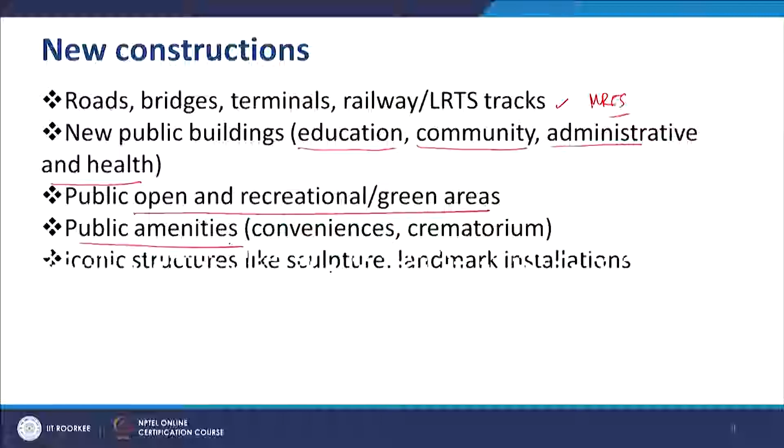Then we make public amenities, for example public conveniences and public crematoriums - all these are required. Iconic structures like sculptures and landmark installations - sometimes we make landmark installations at road intersections or terminals so they can create an iconic structure as a landmark. We create sculptures, landscaping elements, street furniture, and sometimes underground utilities which also help people in various ways. These kinds of construction are required in urban local bodies.

At the same time, we do repair and maintenance - roads need regular repair and maintenance work. Most of the time municipal engineers are busy with road repair and are not able to devote their time and attention to any other work, because roads are such a matter which needs regular supervision and maintenance due to adverse weather conditions throughout the year.

Buildings also need significant repair and maintenance. Underground and overground utilities—for example, the sewerage line, drainage line, electrical line, water supply pipeline—so many networks are there in the cities which we need to maintain on a regular basis, including household connections for water, sewer, drainage, and cleaning.

Now, all these are dedicated works, and what major municipal corporations or cities have started doing is to integrate all the service pipelines in a common duct. They are making a common permanent duct, and within that major duct they are accommodating all the pipelines like this.

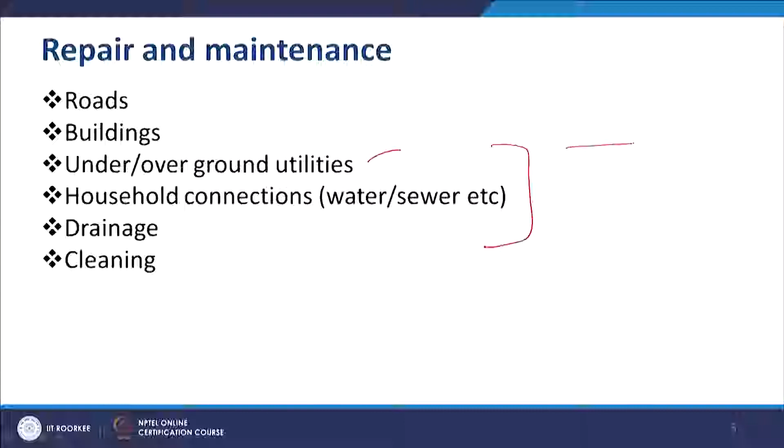This kind of installation is also possible, but definitely this is costly. Even so, it is permanent, so a person can enter and repair it. This is called a permanent common utility duct, and this kind of trend is also coming in a big way in our cities.

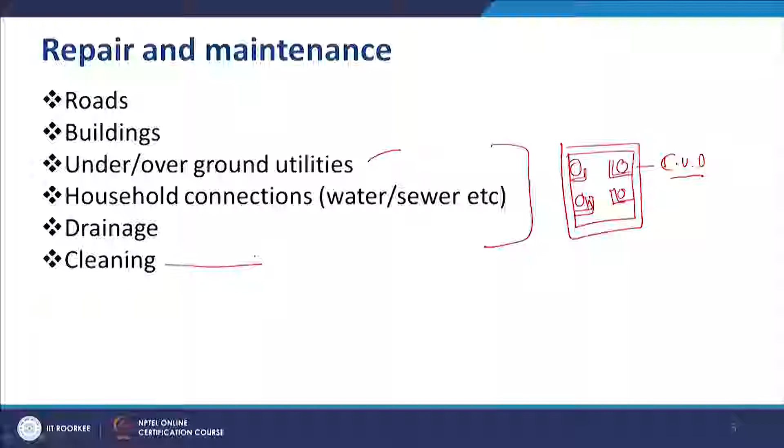Then cleaning is another regular maintenance work in our cities. Every day municipal workers need to clean the roads and other public spaces. So what kind of considerations must we take for the engineering design?

First, I would like to take an example to recall that you might have seen great public buildings or public infrastructure created by the earlier generation. They are very nice, permanent, and nicely maintained, but in the current generation, sometimes due to lack of cost or lack of attention to minute engineering details, it lacks that kind of finish and durability in terms of the lifespan of the building.

So why not we also create buildings and infrastructure which are durable, good looking, giving a pleasant effect, and also giving essential utilities and benefit to the citizens for long years. So major considerations for such engineering design are: number one, it should be durable for a long lifespan.

When I say long lifespan, it should be a minimum of 50 years. Now if you see the major municipal infrastructure created during the British period, colonial time, more than 100 years back, it is still performing well in some cities like Kolkata, Chennai, Delhi, or Mumbai. For infrastructure we are creating today, it should have a minimum lifespan of 50 years.

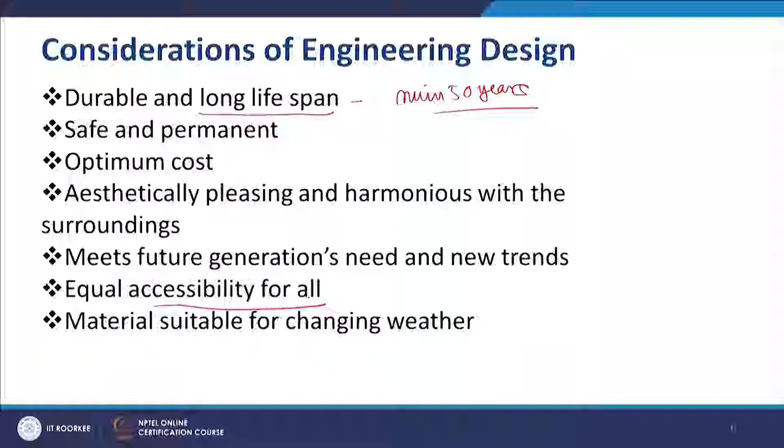Equal accessibility for all engineering and infrastructure design must be given maximum priority, for all categories of age, sex, and persons, including differently abled persons using wheelchairs, and material suitable for the changing weather. In India we have a variety of weather situations.

So based on the weather situation at your workplace, you should choose material which should be permanent in nature, and think about sustainability in terms of repair, change, replace and dispose.

You should not choose a project only based on capital investment. If capital investment is less but recurring expenditure like repair, change, replace and dispose is much more, you should not choose those kinds of projects. Whereas if the capital investment is a little higher than the minimum, but repair, maintenance and operation is much lesser, manageable and sustainable, those kinds of projects should be given maximum priority.

I will mention a few common design and planning terminologies which you will understand as a non-technical person, and this will also benefit technical persons. Few general terminologies used in municipal governance are cost benefit analysis, break even cost, and levels.

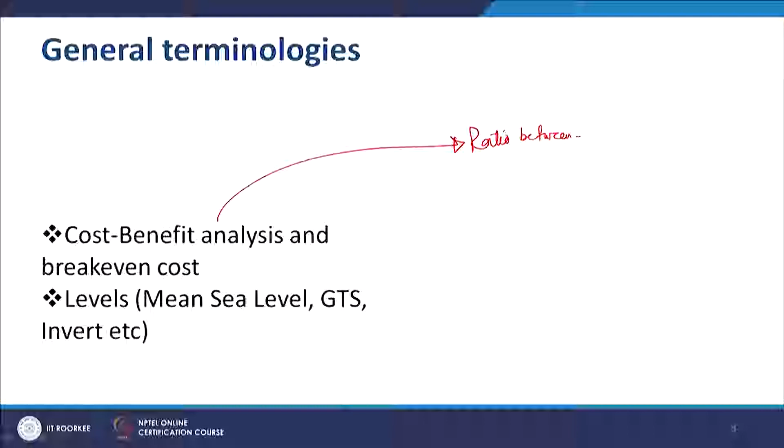Cost benefit analysis is basically the ratio between benefit and cost. So if the benefit is higher than the cost, it should be more than 1.

In a break even situation, the financial benefit is equal to cost, meaning there is no loss and no profit, and most public infrastructures are built this way. But I feel even in public infrastructure, the cost benefit ratio should be more than 1, so there is some surplus which can take care of the sustainability of the projects.

There are various kinds of levels used in engineering design. In most cases we measure the level based on the mean sea level, in short called MSL. In some cases the GTS level is used.

GTS is nothing but, in the British period, there was a Great Trigonometrical Survey by the then Surveyor General George Everest, and based on that survey even now we take GTS levels for land filling or public infrastructure in cities and regions. So sometimes GTS levels are also used.

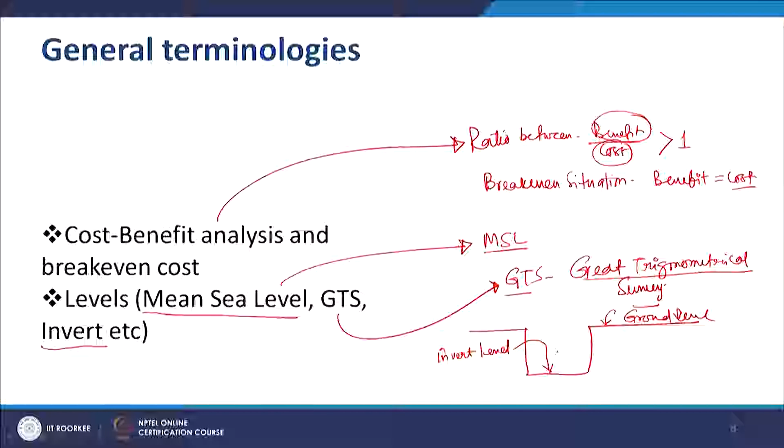Then I'll tell you a few other terminologies, like statutory approval. Statutory approval is basically legal approval. The opposite of statutory approval is non-statutory approval.

For example, making a project report and getting it sanctioned by your funding agency is not statutory approval, whereas a city development plan needs to be approved first by the board of councillors or mayor-in-council, and then by the state government or the district planning committee or metropolitan planning committee — those approvals are termed statutory approval.

Similarly, when a common citizen submits a building plan or development permission, the approval given is called statutory approval for construction of the building. Statutory approval could be for the building, the land use, or the infrastructure, and it must every time be mentioned under some law — usually the Municipal Act, Town and Country Planning Act, or Land Registration Act, and so on.

Similarly, terms like mutation, sanction drawing, and working drawing are very popular in municipal governance. Mutation is the process of changing the name of ownership of land — when you purchase or sell land, you transfer it from person X to person Y through the land registration department, and when that changeover is recorded in the municipal office, that process is called mutation.

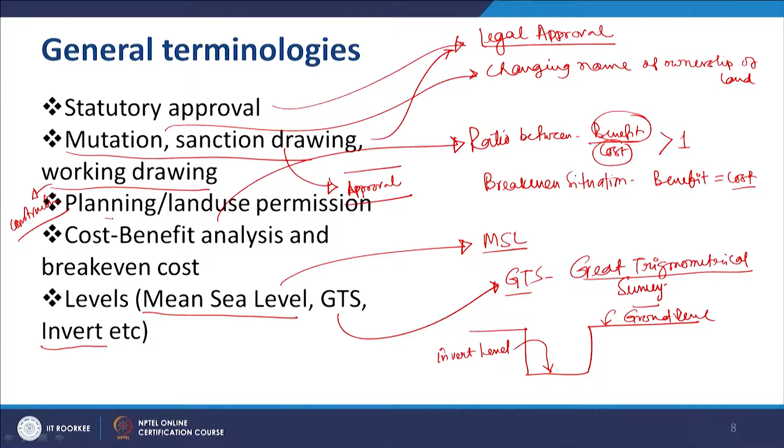Sometimes your role will be as an approval authority, sometimes your role will be as an authority asking for the approvals. Planning and land use permission is given, in most of the cases, under the Town and Country Planning Act.

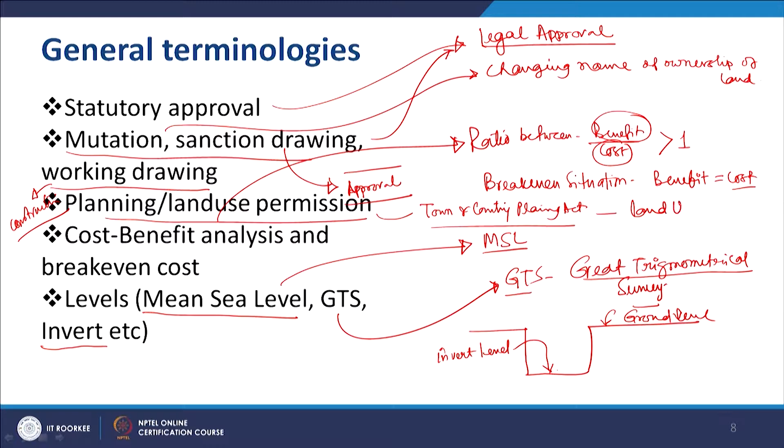It is the permission of the land use. For any construction of the building or infrastructure, you need to take the permission of the land use in particular. So that permission is called planning permission or land use permission.

In most of the cases, development authorities or metropolitan development authorities are entrusted or delegated this power. In some cases, municipal authorities can exercise this power also, if it is given by the state government for the land use permission. After the land use permission, they can go for the statutory permission for the building and the infrastructure.

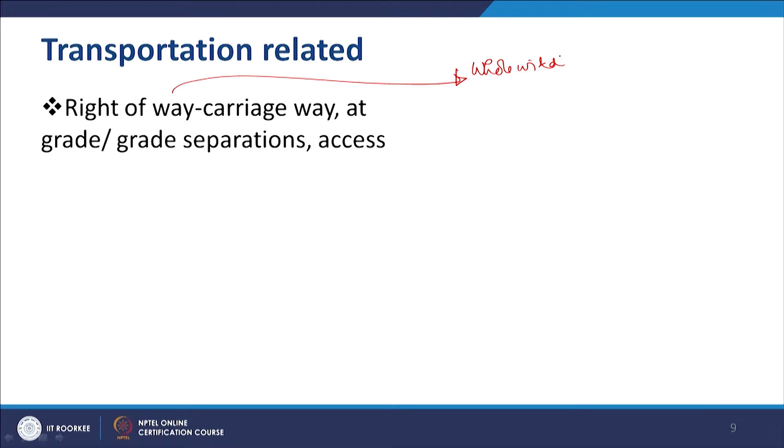After that, there are a few terms related to road and transportation which we use in everyday work. For example, right of way and carriageway. Right of way is the whole width of the road. For example, this is a local road. So this is the property line, and this is also property line, and this is footpath, and this is the area for the vehicle. So this particular stretch which is used for the vehicle is called carriageway, whereas the whole width of the road which is available is called right of way.

Usually carriageway is lesser than right of way, because right of way consists of everything like carriageway, footpath, cycle track, landscaped area, areas for the networks, everything. I have just drawn a very simple section of a local street so that you can understand.

Then, grade separation. Grade is basically the level where the road passes. For example, I am showing a typical traffic intersection which is happening at the same level, without any level difference, where all the journeys are maintained at the same level, either using a signaling system or some roundabout. This kind of level and intersection is called intersection at grade.

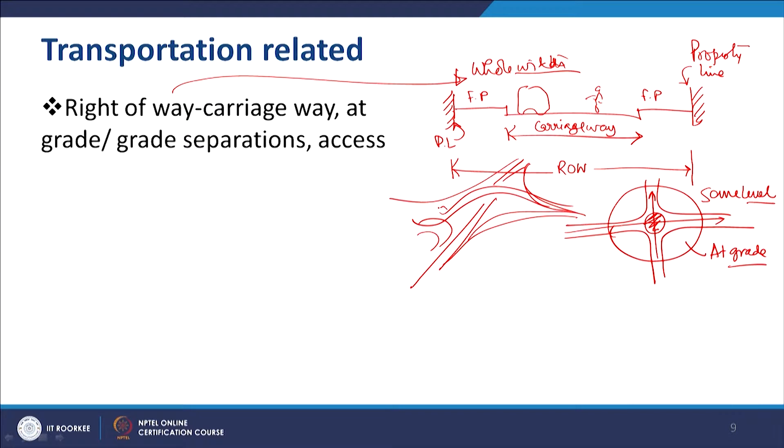So at grade means basically at a single level, and in some cases we can use flyovers like this. You must have seen flyovers like this. So if this kind of arrangement is done, this is called grade separation.

Grade separation is basically separating the grade into various levels, so that one particular movement is given an uninterrupted flow by making various grades. This is a term used in transportation planning, for making new flyovers, upgrading existing flyovers, or existing traffic intersections.

Access is a common term, but it is also a technical term in terms of whenever you are going to give permission for a building. Every building or premises must have a means of access, and without the means of access, the building permission cannot be given.

So the first thing which you should check is the land ownership document for giving any permission. Second is the means of access. If there is no acceptable means of access, sometimes municipal authorities make a benchmark that for less than 3 meter means of access, building permission cannot be given. So those kinds of stipulations are there, and access needs to be checked before giving any permission.

Further, we use various curves like summit curve, valley curve, simple curve, compound curve, spiral and reverse curve. In this kind of traffic intersection, when there is a curve like this, it is called a simple curve, having only one center and radius.

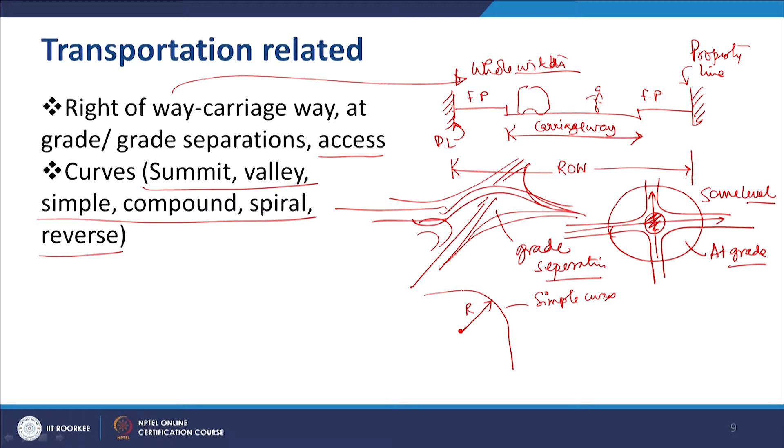Then we can make a compound curve. A compound curve has more than one radius.

We can have spiral curve, which we use mostly in traffic intersections, or we can have a reverse curve, something like this. And then we can have summit curve and valley curve.

Summit curve is when a flyover is made like this. This is called summit curve, which is utilized for reaching the topmost portion of a flyover, and this is called valley curve, which is taking the vehicle from the ground level to the higher level. So, these are the terminologies related to curve we use for geometrical design of the road, horizontally and vertically both.

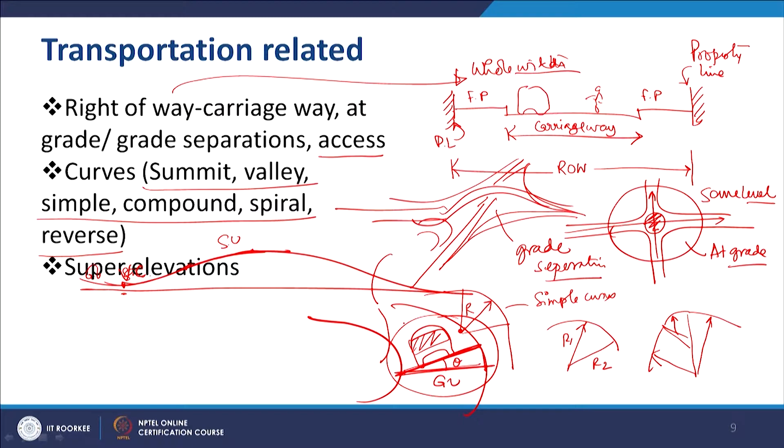Geometrical design of the roads can be horizontal, vertical, or other than roads we can also design flyovers. Super elevation is used when we calculate the turning of a road and vehicle. When a vehicle turns along a road there is a super elevation required, if this is the ground level and this is a turning, this should be the level where the new angle is required to maintain the speed and safety of the vehicle. This phenomenon is called super elevation. It is an essential design element which we maintain whenever there is a curvilinear pattern of any road or flyover.

Then there are terminals. Terminals are basically the termination point of any transportation network. It can be a railway terminal, a bus terminal, or a metro rail terminal.

TOD is basically transit oriented development. In many cities in India there are metro rails or mass rapid transit systems being developed. Along the mass rapid transit system, high density compact developments are being encouraged. That kind of development based on compact high density walkability and a mass rapid transit corridor is called transit oriented development. In cities like Mumbai, Calcutta or Delhi, the suburban railway system is also based on transit oriented development.

Trips, as you know, trip is basically a unit of transportation, travel from place A to place B by any means is called a trip. A trip could be educational, for home and office, or for any recreational purpose. Travel demand is the demand in terms of trips, number of trips from one zone to another zone, and that is calculated based on the demand and surveys.

Traffic volume is the traffic volume at a given point of time in any cross section of a road. Turning radius is the minimum radius required for turning a particular vehicle. Turning radius for a bigger vehicle will be more than the turning radius of a lower vehicle. For example, for a small car the turning radius could be 4.5 meters, and for a large truck it could be higher, like 12 or 13 meters. All these are given in the codes, IRC codes, but I just mentioned them for your better understanding.

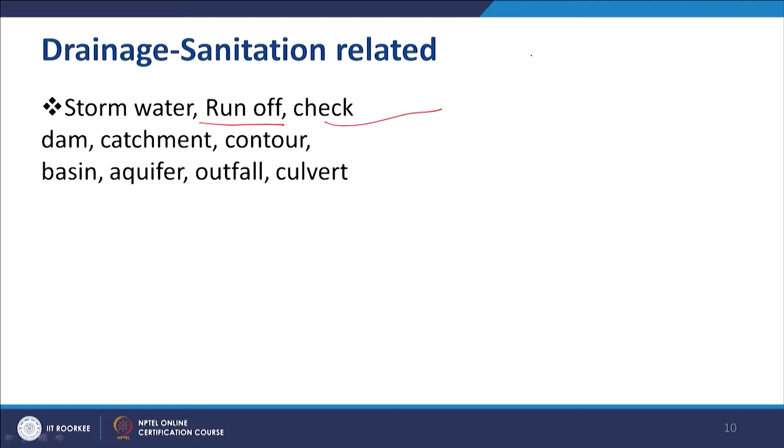If there is a flow of water like a river, check dam is used to control the river water, and after controlling it, to use the river water by desired means. That is called check dam.

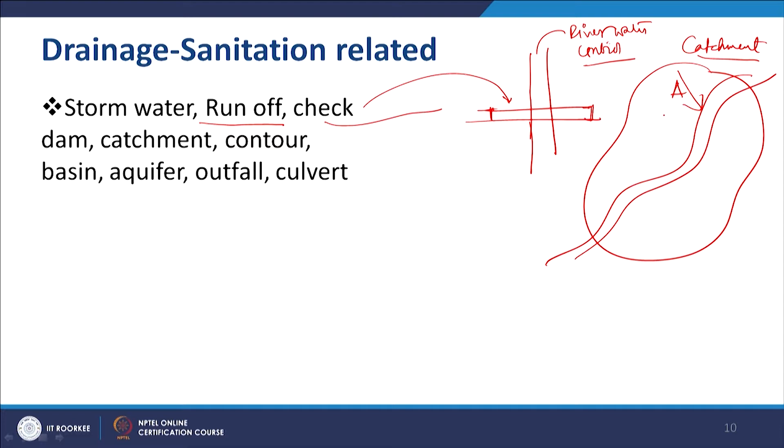Catchment is a technical term used in drainage and other purposes. Catchment, as discussed earlier, is a geographical area which accumulates the water of a particular basin. If there is a river like this and the surrounding areas, and the water of the surrounding areas is collected into that river only, then that is the catchment area of that river, and the whole area is also called the basin area.

Aquifer is the term we use for levels below the ground level. If this is the ground level, then there are several layers, and below some layers there are layers of water. That water layer below the ground level is called aquifer.

Why is it important? Because the level of the aquifer will help you determine the depth of your foundation, depth of your various underground installations, and also in some cases whenever you need to take water from the aquifer, that also requires this kind of data.

This data is available under Government of India websites, and aquifer is a very common term in normal drainage and sewerage construction. Outfall is the natural element like a river, lake or canal, where the runoff due to storm water goes and discharges. Outfall is another technical term used here. For example, in this case, the river itself is the outfall of this water.

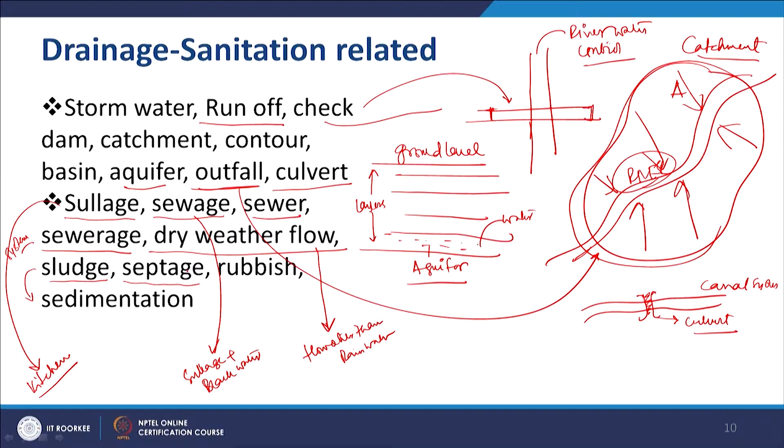Sludge is the decomposed liquid which is discharged into a sedimentation area after the treatment. Septage is the science of sewerage and sanitation using the septic tank, that is called septage. Rubbish is the construction and other waste which is collected at municipal constructions or various activities, and also treated and disposed of in some other particular place.

So these are also a few terminologies which we use very commonly as day-to-day terminologies for sewerage and drainage. Then there are a few terminologies related to building construction. Admixtures are various mixtures used in building construction: cement, concrete, stone chips, sands - all these are admixtures.

Area, FAR, ground coverage - areas, particularly after RERA, the Real Estate Regulation Act, we use carpet area. Carpet area is basically the usable area within an apartment. If we add the areas of the walls and a few common areas, it becomes the built up area. So built up area and carpet area are both very important terminologies used in building construction.

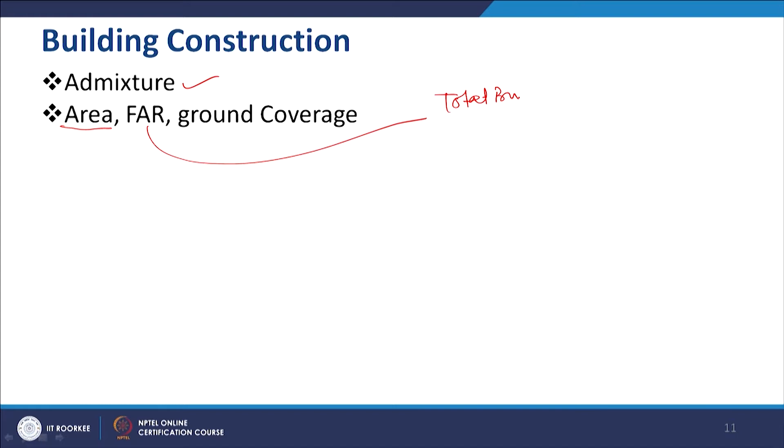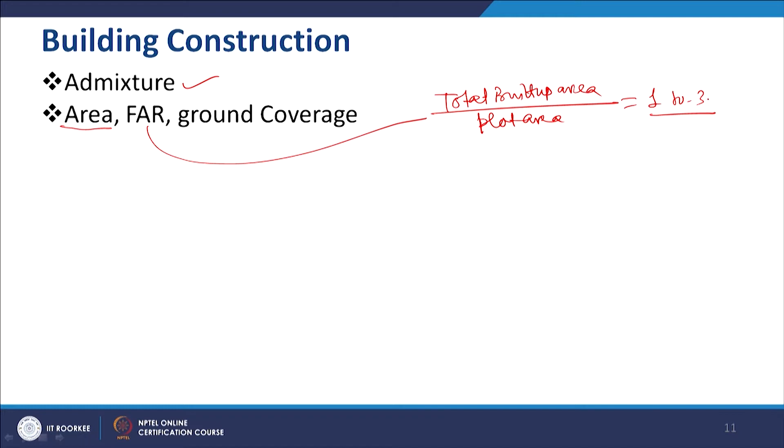FAR is basically the total built up area divided by the plot area. Usually it is more than 1, it can be 1, 2, 3. Usually you can check your local bylaws for what applies.

Ground coverage - if this is the plot and this is the building premises, so if the total area is A and the covered area is small a, ground coverage is basically small a divided by A, expressed as a percentage. One common confusion people make is that if in elevation a building has some projection, the projected area also comes under ground coverage. So do not be confused - projected area is also included in ground coverage. It is not that you keep a setback at ground level and then at a higher level just make the projections; it does not work that way.

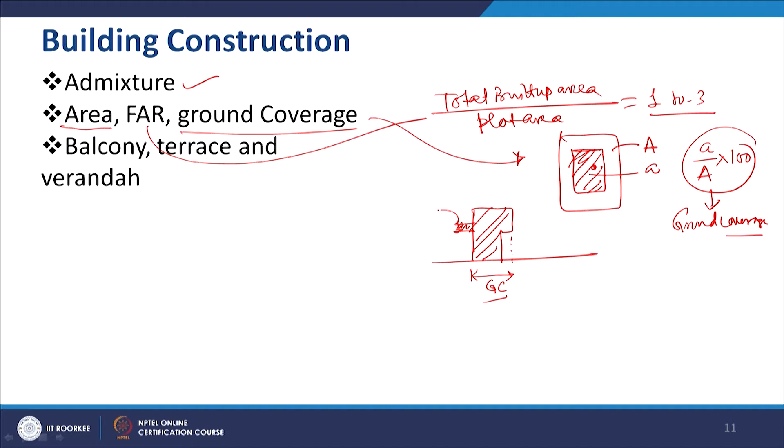Then balcony, terrace and veranda. A balcony is basically a projected area. A terrace is a completely open to air area. And a veranda is basically a balcony, but which is covered by the floor above.

Balusters and balustrades - whenever there is a railing, there are vertical supports for holding a handrail, and these are called balusters, and when a series of balusters are there, it is called a balustrade.

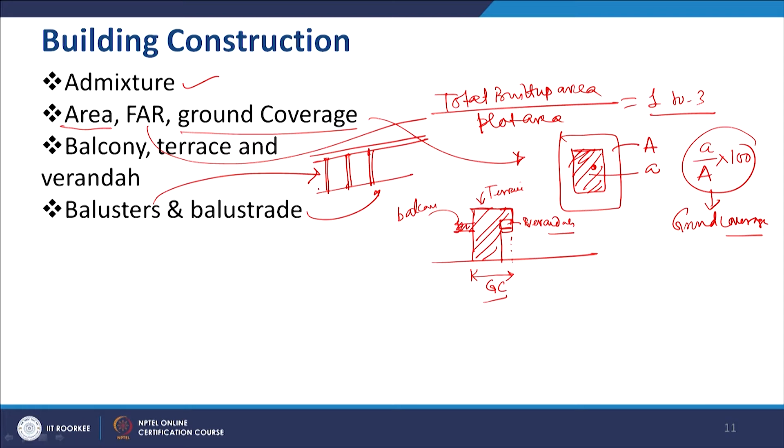Then there is cast in situ, which means the concrete or any element is being cast in the site itself. That is called cast in situ.

Compressive strength of concrete or any other material is the strength required to withstand compression when you compress from both sides. Tensile strength is the strength required to withstand tension, or when we pull the material. For example, concrete has better compressive strength and steel has better tensile strength.

RCC and PCC, I hope you know, reinforced cement concrete and plain cement concrete. Precast and prefabricated concrete and other elements are also very popular in current construction.

Formwork is the external structure done temporarily to make or cast the actual structure. That is called formwork.

Cladding is the external surface which is required over the wall or over any architectural piece.

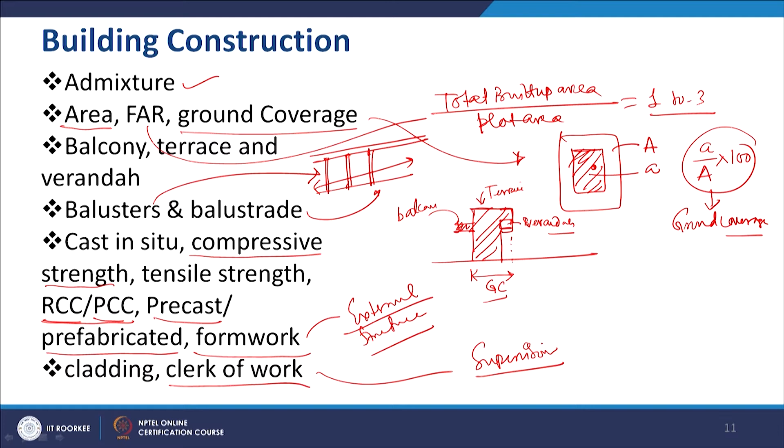Clerk of work is basically a supervisor who is responsible for the day to day quality supervision of a project. So whenever you do a building project or any infrastructure project, you need to have a clerk of work included in the project cost.

Then there are a few other construction terminologies like aggregate, coarse aggregate, and fine aggregate. As per the code, there are standards for how we can identify coarse and fine aggregate. For example, sand and stone chips are there. Usually stone chips are the coarser aggregate, and sand and cement are the fine aggregate.

Building loads could be dead loads, live loads, wind load, and seismic load. Dead load is the weight of the building, live load is the weight of the living beings including humans and plants. Wind load is calculated whenever the intensity of wind is much more, especially in coastal areas.

Seismic load is calculated also in coastal regions, in seismic prone regions. So all these are loads which are considered during structural design by the engineers.

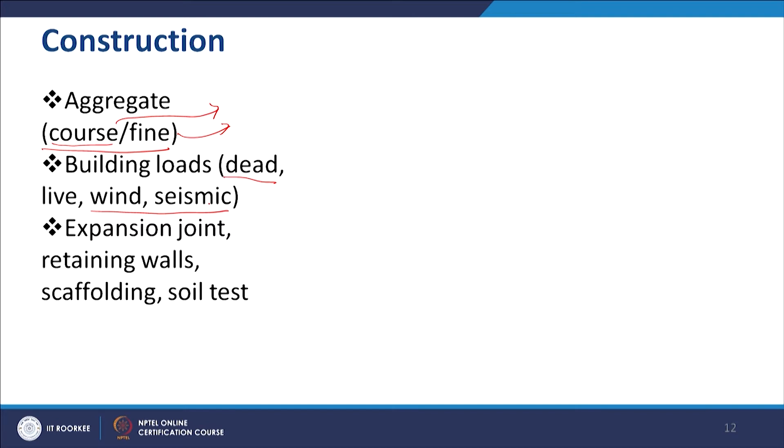There are expansion joints between two parts of the building, which is important. Usually as per the code it is minimum 25 millimeters. So this kind of joint is very common when you construct a large building.

Retaining walls are required to withstand the load of a higher built form. This kind of structure you must have seen mostly in hill areas. Retaining walls are built to withstand the load of earth mass, so that it does not fall below. Scaffolding and soil tests are also temporary structures required to make the formwork of the building structure.

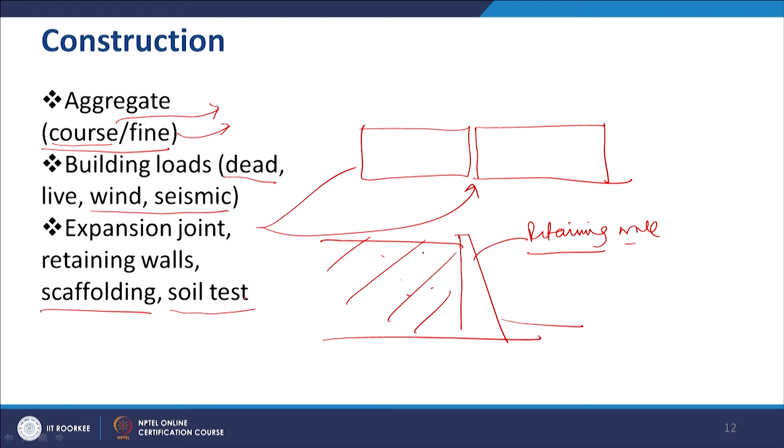Soil test is done for every construction before the start of work, so that the design can be based on the soil test. It gives the criteria for designing the foundation of the building.

Stirrups is basically the steel member which binds all the reinforcement of a concrete structure, and it is very common in concrete construction. So I just mentioned a few common engineering terminologies for your better understanding.

You must have heard many of these terminologies, but those working at municipalities or urban local bodies find these common terminologies familiar, though some of you sometimes have confusion between them. That is why I have discussed this, but I will definitely share reference material so you can read and understand more.

Having said that, the next lecture will be on project management. We will discuss how we can manage transport and large municipal projects.

So, having said that, I would like to quickly summarize and conclude today's lecture. Today we discussed various aspects of engineering design. We mentioned that in earlier generations people made fantastic engineering designs and pieces of infrastructure which were durable, permanent, and had less need for repair and maintenance. In the current generation also we can do that.

There are several considerations for the engineering design of infrastructure that we have discussed, and in the end we also mentioned various common terminologies related to building plan sanctions, building construction, road and transport, drainage, sewerage and sanitation. So I hope you got some idea about engineering design. Having said that, thank you very much for attending this lecture.